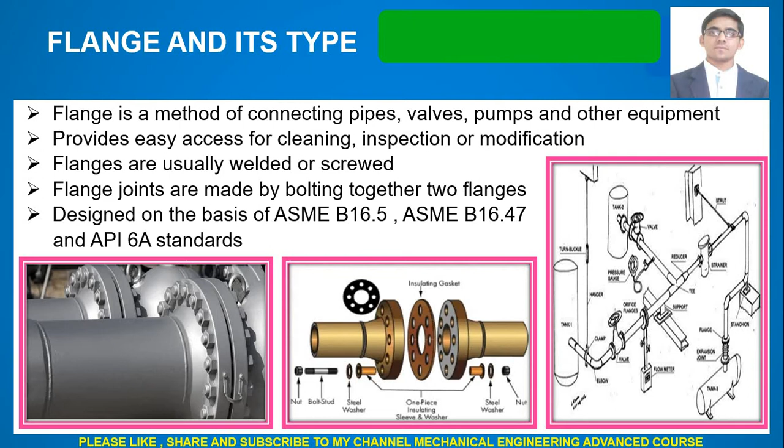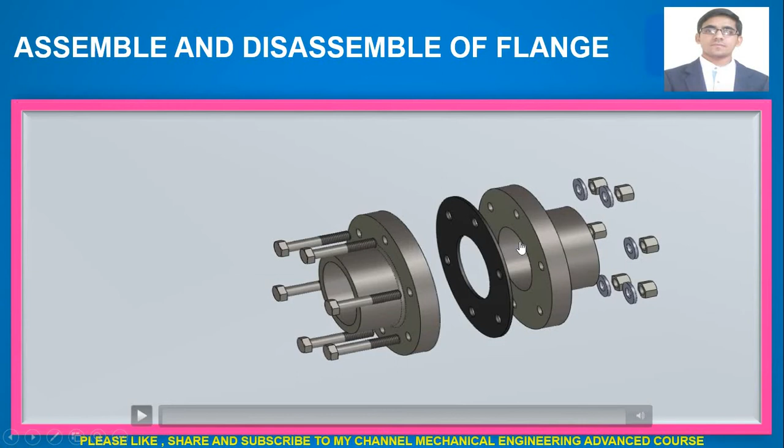Please watch this animation just to know how the flange is assembled and disassembled. This is assembling, and this is disassembling of the flange. So for flange connection, what we need is two flanges, then a stud bolt and nut, and one gasket.

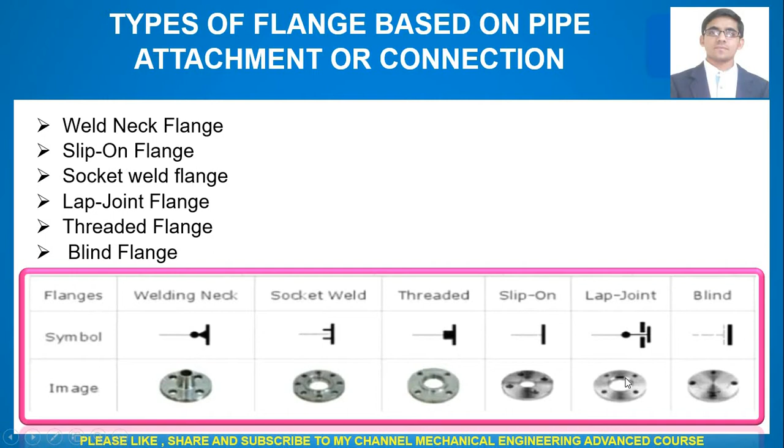Now we'll see types of flange based on pipe attachment or connection. These are the most common types of flange: weld neck flange, slip-on flange, socket weld flange, lap joint flange, threaded flange and blind flange. These are the images of different types of flange, and these are the corresponding symbols of the flange. So first we'll see weld neck flange.

It is the most widely used type of flange, and it gives the highest level of joint integrity due to butt welding, and it is used in high pressure and temperature applications. It is bulky and costly in comparison to other types of flange, and hence it needs more space for installation. It is available in all sizes, and it can be flat face, raised face or RTJ type.

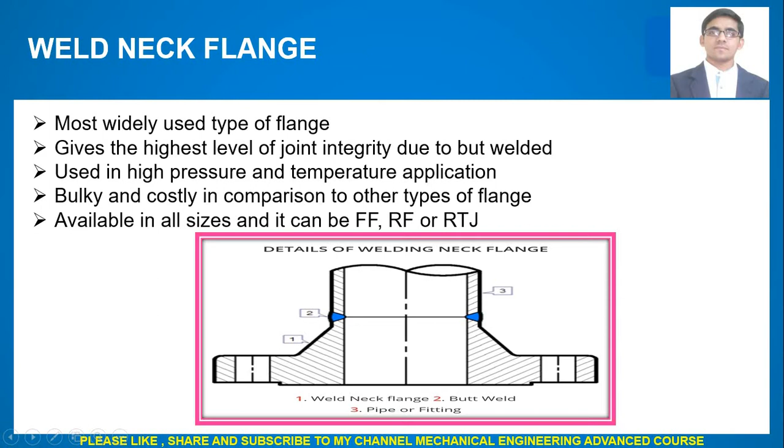This is the detail of weld neck flange, also known as welding neck flange. Here, this one is representing the flange, this two is representing butt weld, and this three is representing pipe or fitting. This is the symbol of weld neck flange, and this is how weld neck flange looks like, this is the image.

Slip-on flange: it has a hole with matching outside diameter of the pipe. That is, the circular hole of the slip-on flange will be matching with the OD of the pipe. This flange is placed on pipe and fillet welded from both inside and outside. As you can see here, this 3 is representing fillet weld from inside, this 2 is representing fillet weld from outside, this 4 is representing pipe, and this 1 is representing slip-on flange.

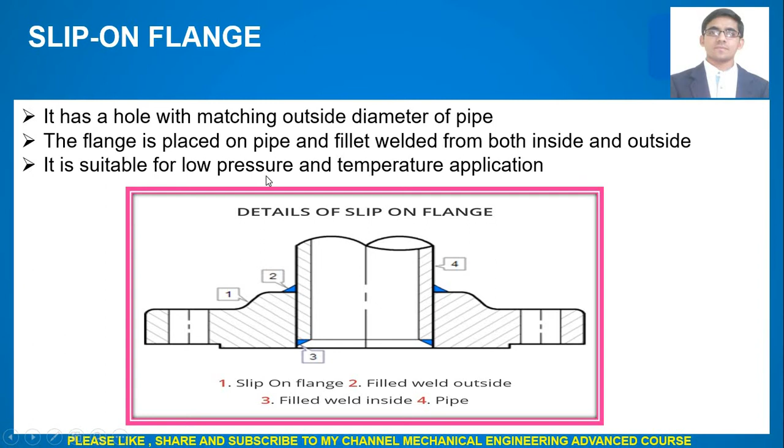It is suitable for low pressure and temperature applications. This is the symbol of slip-on flange and this is the image of slip-on flange.

Now socket weld flange. It has a female socket in which the pipe is fitted. As you can see here, this is the female socket, and this is the symbol of socket weld flange. Fillet welding is done from outside on the pipe. Generally it is used in small bore piping, and it is suitable only for low pressure and temperature application.

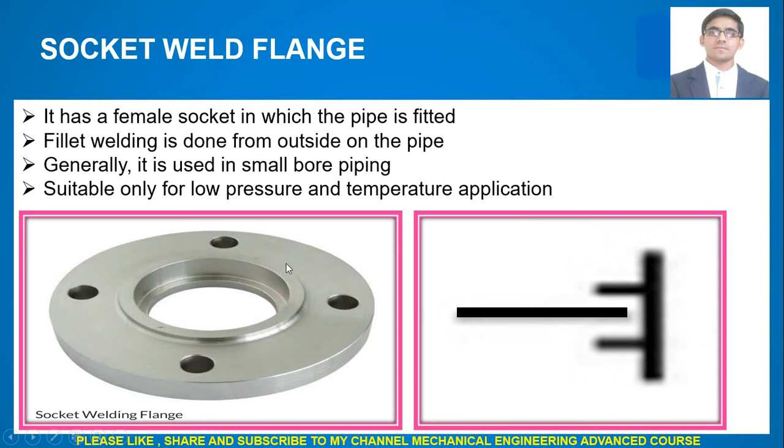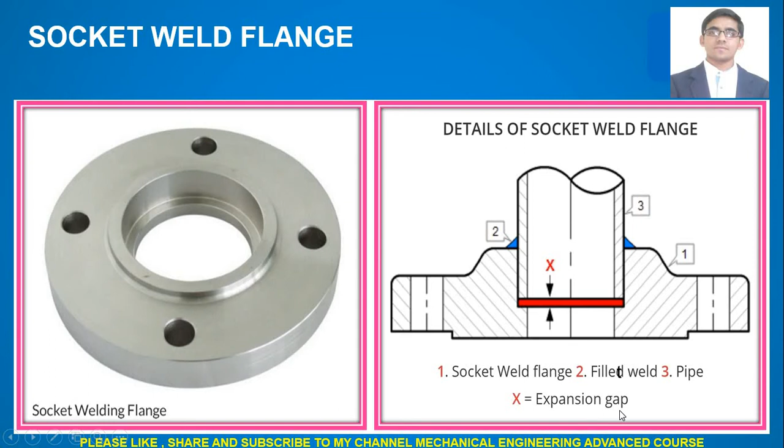This is the detail of socket weld flange. 1 represents the socket weld flange, 2 represents fillet weld from outside, and 3 represents the pipe, while X represents the expansion gap. The expansion gap is given because if hot fluid passes through the pipe, the pipe will expand, so to compensate for that expansion, the gap is given. This is the image of socket welding flange.

Lap joint flange. Lap joint flange has two components: stub end and loose backing flange. It is used where frequent dismantling is required and space is constrained. The backing flange can be of a different material than the stub material, and this backing flange is normally made of carbon steel to save cost.

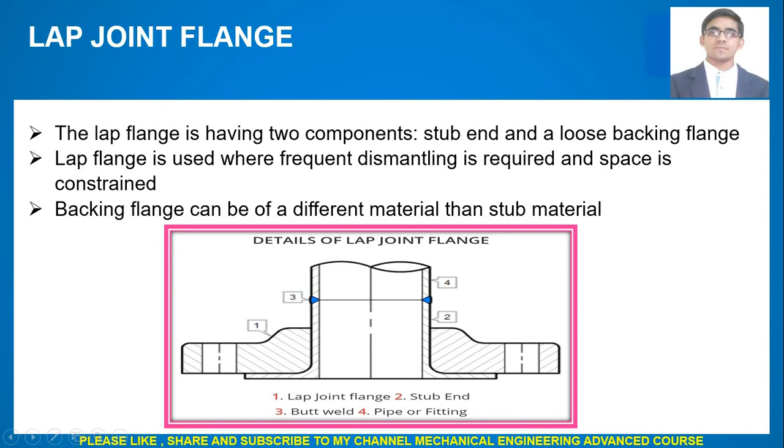The stub end is butt welded to the pipe and the backing flange freely moves over the pipe. This lap joint flange provides better joining due to butt weld compared to socket and threaded type flanges. So this is the detail of lap joint flange. 1 represents lap joint flange, 2 represents stub end, 3 represents butt weld, and 4 represents pipe or fitting. This is the symbol of lap joint flange, and this is how it looks.

Now threaded flange, also known as screwed flange. This type of joint connection is speedy and simple, and it is not suitable for high temperature and pressure applications. It is mostly used in utility services such as air and water, and is available in limited sizes of NPS 4-inch and below. This threaded flange is a low cost flange, and this is the detail of threaded flange.

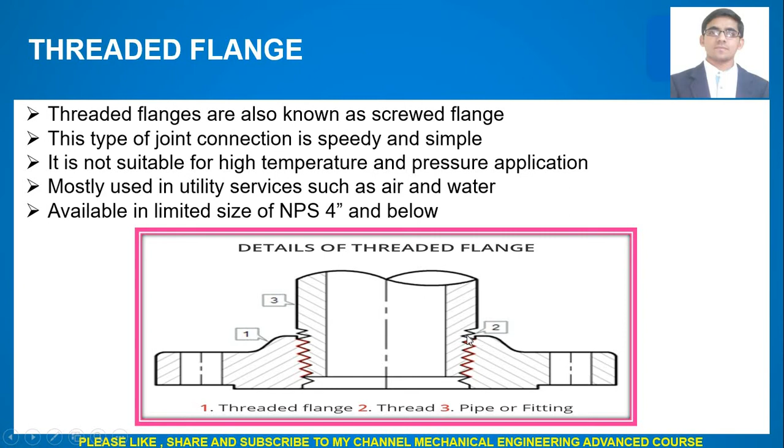Here, 1 represents threaded flange, 2 represents thread, and 3 represents pipe or any other fitting. This is the symbol of threaded flange, and this is how threading is done in this threaded flange.

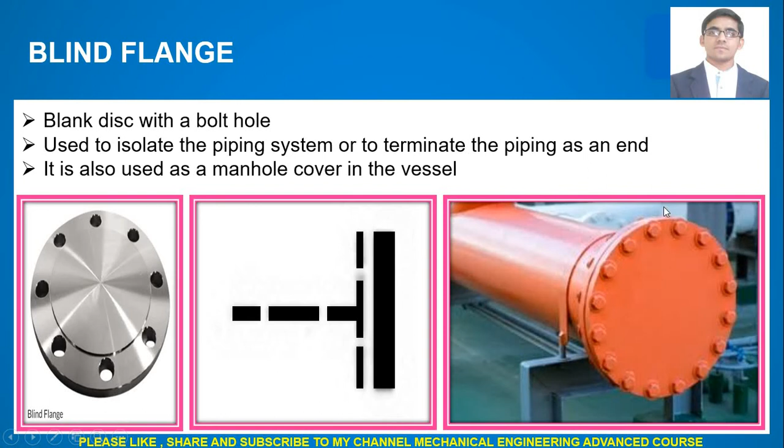Now blind flange. Actually it is a blank disc with a bolt hole, as you can see in this image. This is the symbol of blind flange. It is used to isolate the piping system or to terminate the piping at an end. As you can see here, it is also used as a manhole cover in a vessel. So this is the detail of blind flange.

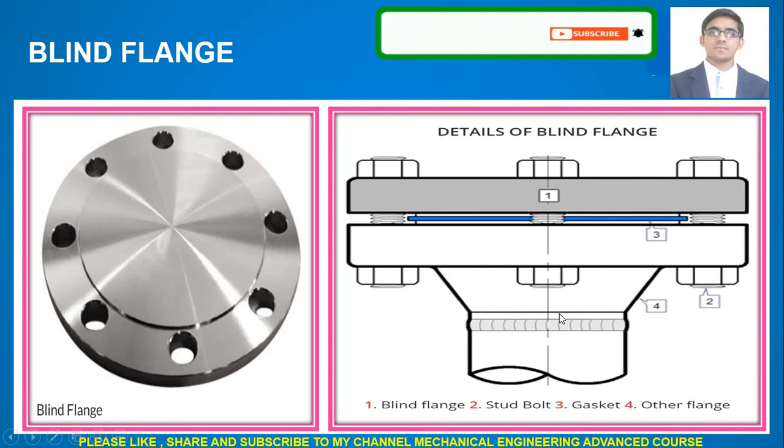Now we'll see types of flange based on pressure temperature rating according to ASME or ANSI B16.5 standard. There are 7 types of flange based on pressure temperature rating: 150 rating, 300 rating, 400 rating, 600 rating, 900, 1500, and 2500 rating flange. So what is pressure temperature rating? Actually, pressure temperature rating is the maximum allowable working gauge pressure at the given temperature for the applicable material and class designation.

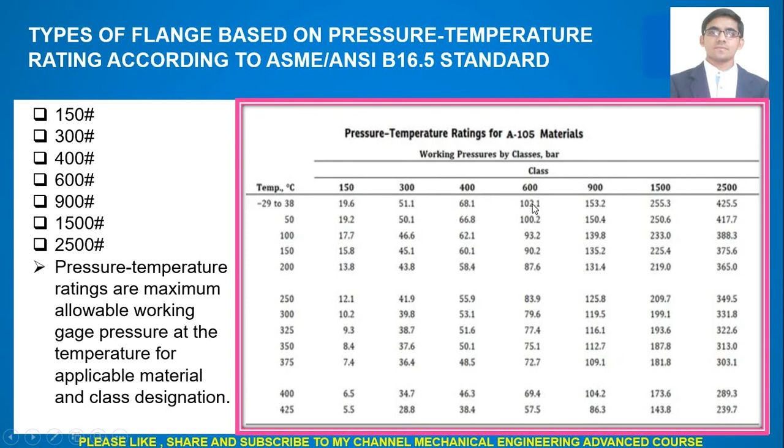You can see in this table the pressure temperature ratings for A105 material. For the temperature range -29 to 38 degrees centigrade and 150 rating, the maximum working pressure is 19.6 bar, and for 250 degrees centigrade and 2500 rating flange, the maximum working pressure is 349.5 bar. So it's very high. As you increase the flange rating or flange class, the maximum working pressure will also increase, and at the same time, if you increase the temperature as well, the maximum working pressure will decrease.

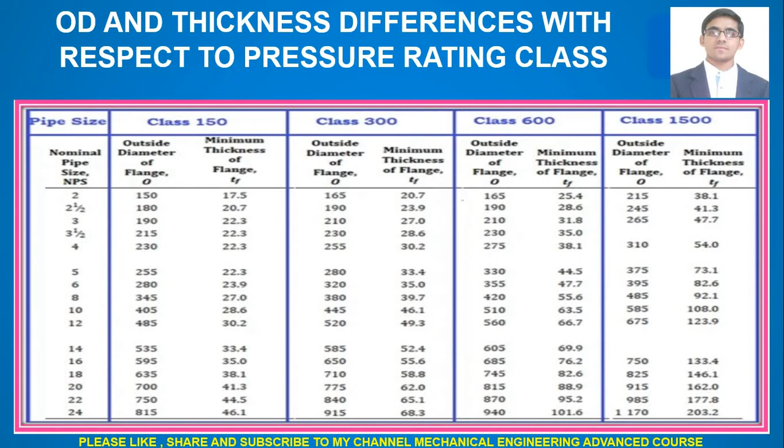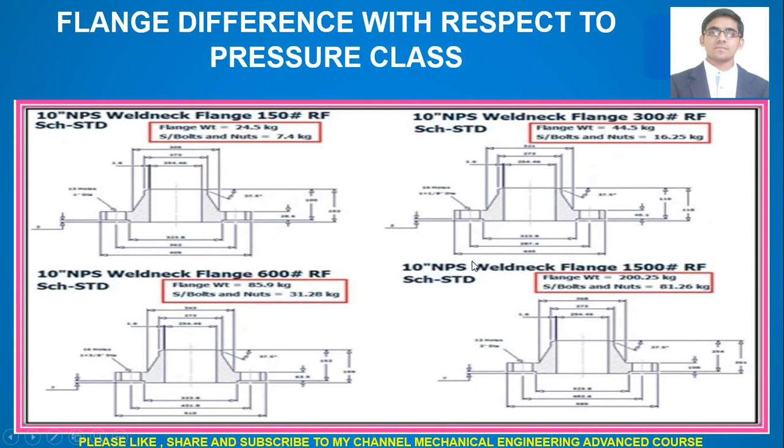Now you can see the difference. For 10-inch 150 rating flange, weight is 24.5 kg, but for 10-inch weld neck flange and 300 rating, weight is 44.5 kg. You can see the difference. And for the same size flange, if we increase the rating to 1500, the flange weight increases to 200.25 kg and its stud bolt and nuts weight increases to 81.26 kg. Now you can see the difference. So in case of very high pressure, we increase the rating of the flange.

Now, types of flange based on flange facing. The first one is raised face flange, then flat face flange, ring type joint flange, tongue and groove flange, male and female flange. The purpose of raised face flange is to concentrate more pressure on a smaller gasket area, and RTJ flanges are typically used in high pressure class like 600 rating and higher, and for higher temperature service above 427 degrees centigrade.

Now, this tongue and groove flange is also known as T and G flange. Tongue and groove faces of this flange must be matched. One flange face has a raised ring known as tongue, machined onto the flange face, while the mating flange has a matching depression, that is groove, machined into its face. These are most commonly found on pump covers and valve bonnets.

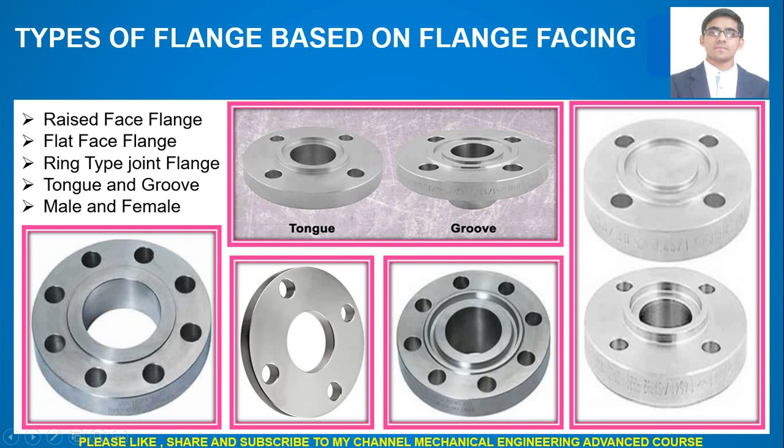Now this is male and female flange, also known as M and F flange. In this, one flange face has an area extending beyond the normal flange face, known as male, and the other mating flange has a matching depression, known as female, machined into its face.

Now the types of flange based on governing design codes. The first one is ASME or ANSI flanges, covering ASME B16.5, ASME B16.47 etc. Then BS flanges, that is British Standard flanges, covering BS10 and BS1560. Then comes API flanges, covering API 6A or API 17D. Then DIN flanges, and then custom made flanges.